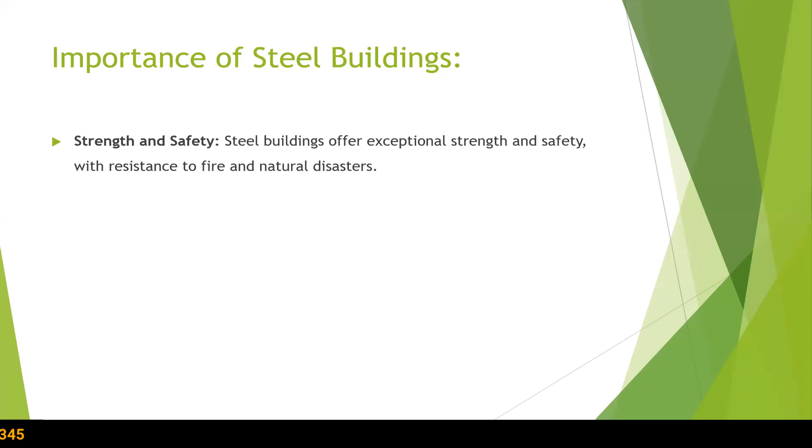Now let's understand what is a steel building. Importance of steel building: why are steel buildings important as compared to RCC buildings, or what is the basic difference between them? As every one of us knows, steel is a structural member. It has some structural strength. That is why it can be used to build any kind of structural system, like steel buildings. It has exceptional strength, and when we have proper coating over it, it can also be fire resistant.

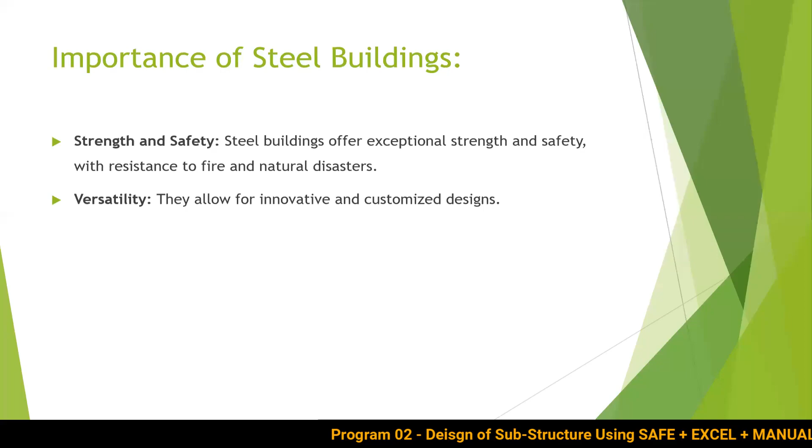The next importance of the steel building is its versatility. Because of steel, we can customize it. If we compare the steel building to an RCC building, it is very difficult to have customization in an RCC building once it is constructed, because we cannot easily modify things in concrete. But when we construct a steel building and at a later stage want any kind of modification, it is possible. That is one of the advantages of steel.

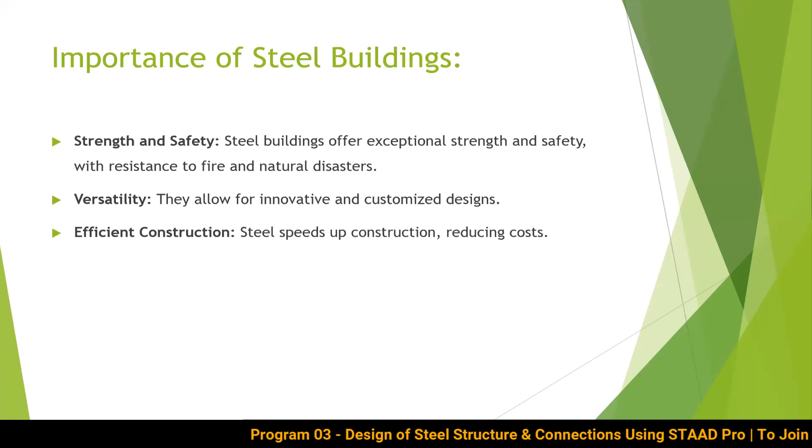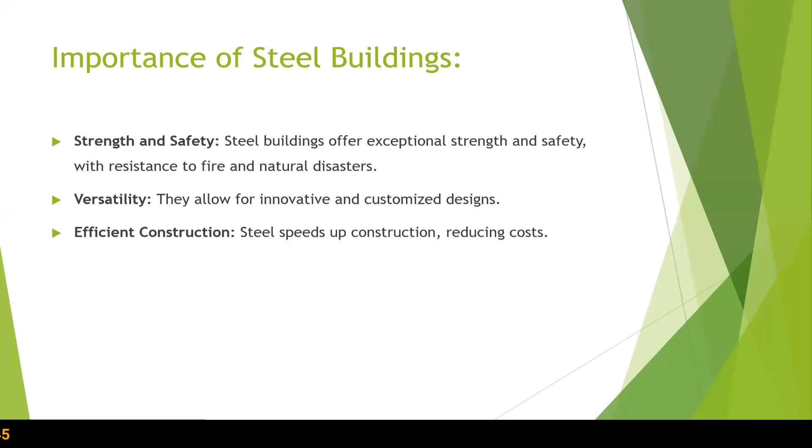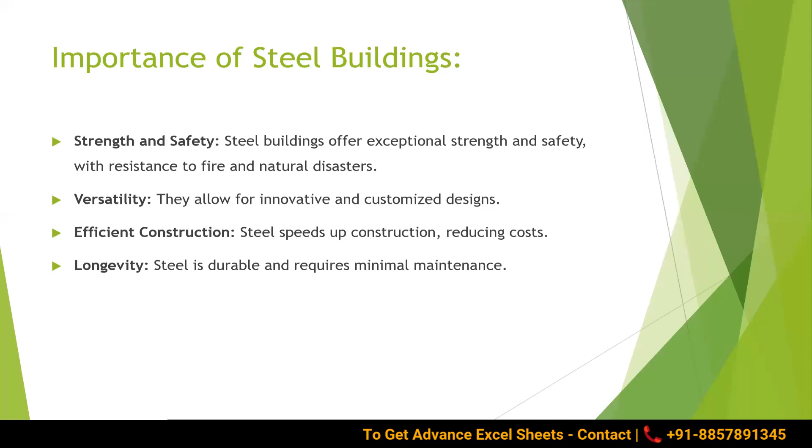Of course, all the members like columns and beams are prefabricated in a warehouse and transported to the construction site, where they are quickly assembled. This will also be cost effective and could speed up construction compared to an RCC building. And steel is a durable material, which is why we can have a long lifespan of a structure. One of the advantages is strength to weight ratio.

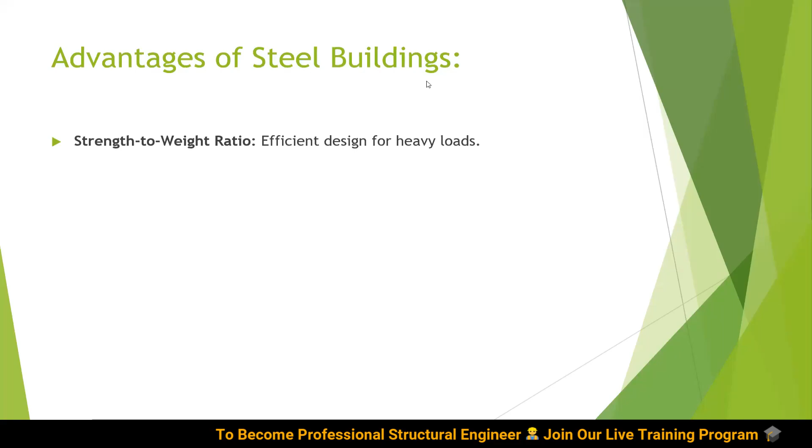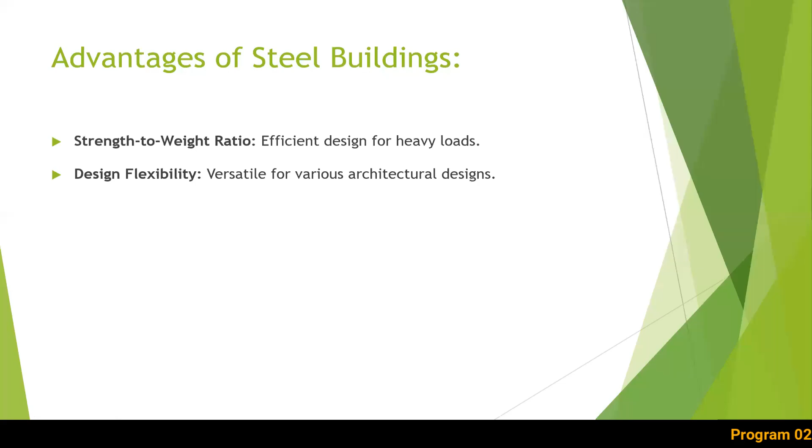So one of the basic advantages of a steel building is the strength to weight ratio. Compared with an RCC column, a steel column is smaller in size, and it also has an advantage in weight. So when we compare the ratio of strength to weight, steel is on the better side. Next, we have design flexibility. As we have already discussed, flexibility in design is possible in a steel building, because you just have to weld or bolt additional members to it. In an RCC building, it is not easily possible to make changes.

Next is sustainability. As steel is a recyclable material, it is easier to recycle compared to RCC concrete. Once we cast concrete and then demolish it, we cannot use the same RCC again. But in the case of steel, you can recycle the steel and use it next time. So it's an eco-friendly thing.

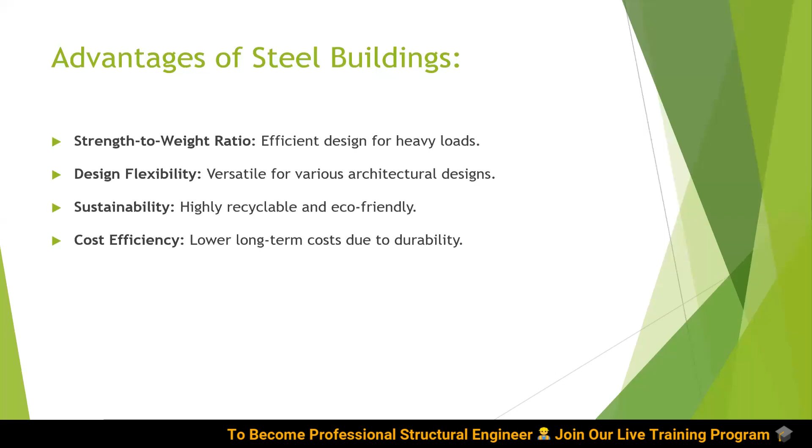Cost effective. Generally, we cannot say that steel buildings are cost effective. Of course, they are costlier compared to an RCC building in the initial stage, but it depends from project to project. With proper engineering, the initial investment could be more, but in the long term a steel building could sometimes be advantageous compared to an RCC building, if we compare all the other factors involved.

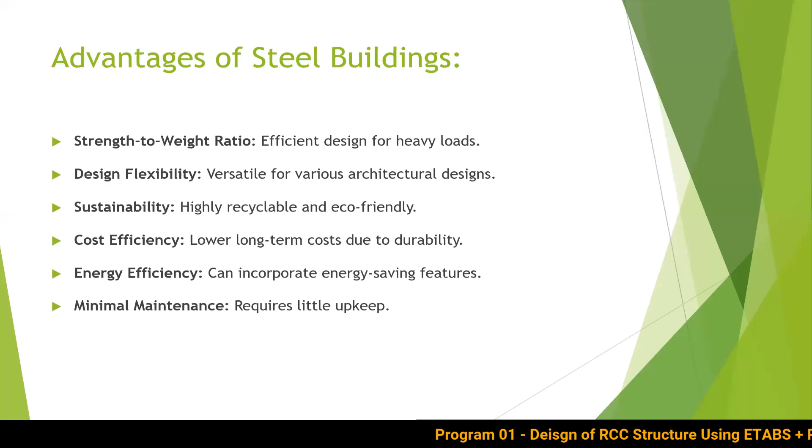Next is energy efficiency. As it is a recyclable material, we have efficiency in energy and it is good for the environment. We have minimum maintenance in steel structures. One of the most important problems with a steel building is rusting. Nowadays we have certain chemicals which, when applied to a steel building, make it rust proof. So this problem can also be solved, and it requires minimum maintenance.

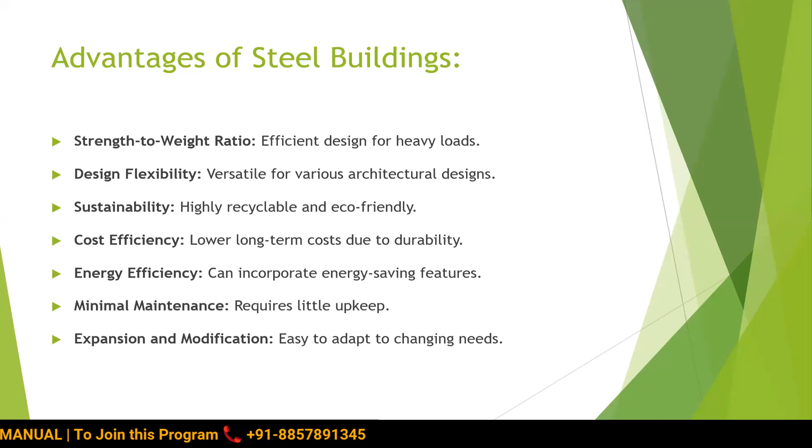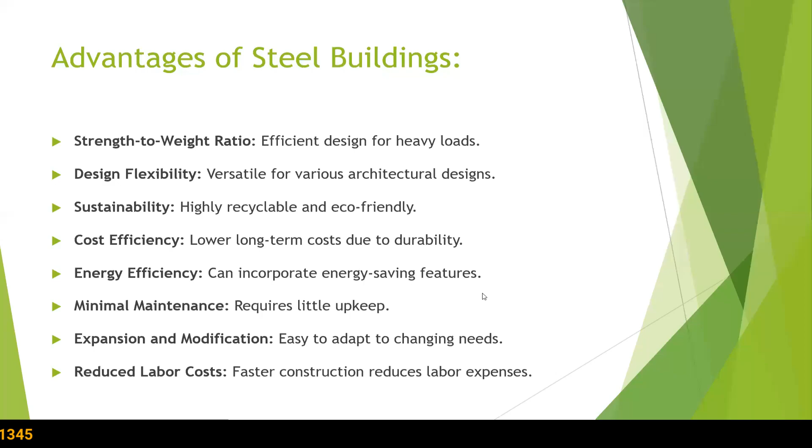And as it is flexible, it is easier to expand a steel building, and if you want any kind of modification, it is easier. All the elements of a steel building, whether a column, primary beam or secondary beam, are fabricated in a workshop and then transported to our site, where we can erect them quickly. So this is faster compared to an RCC building, and we can also have cost benefits. Okay, so these were some of the advantages.

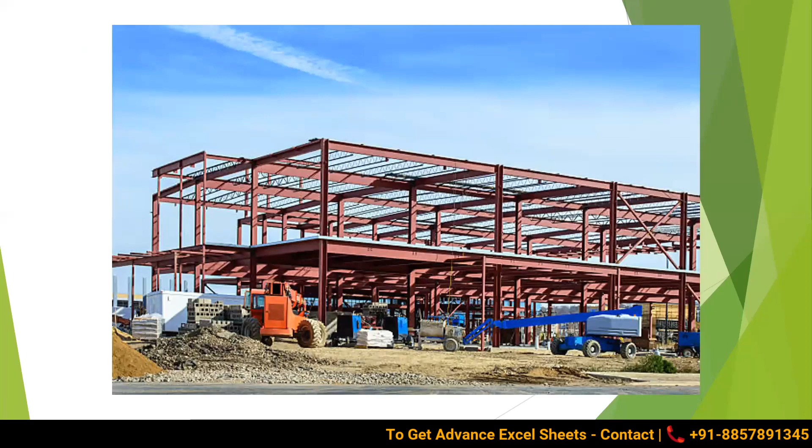I will show you some pictures so that you can understand how a steel building looks, because in India we do not have many steel building structures, but this will give you a rough idea.

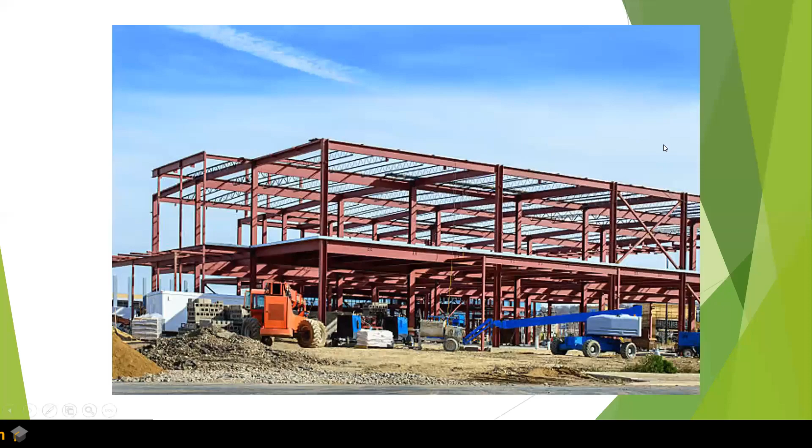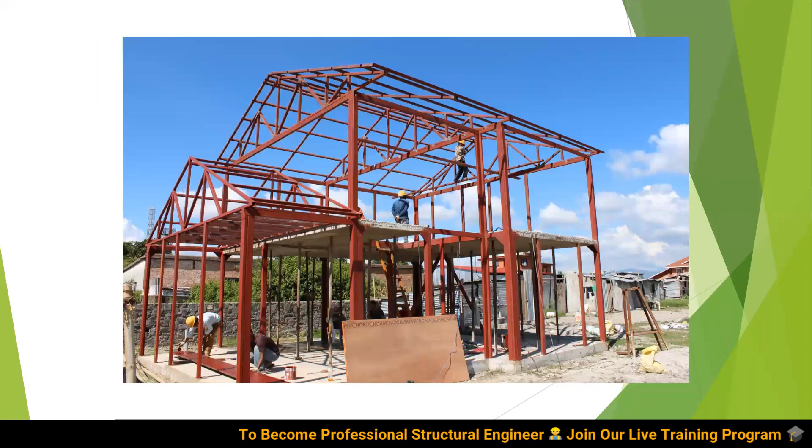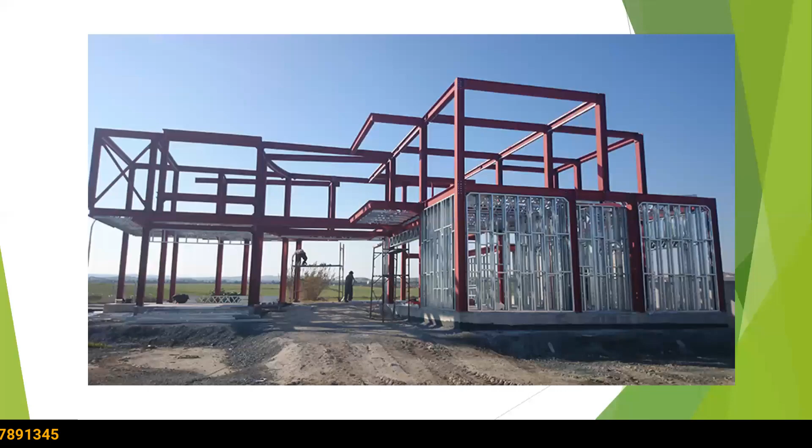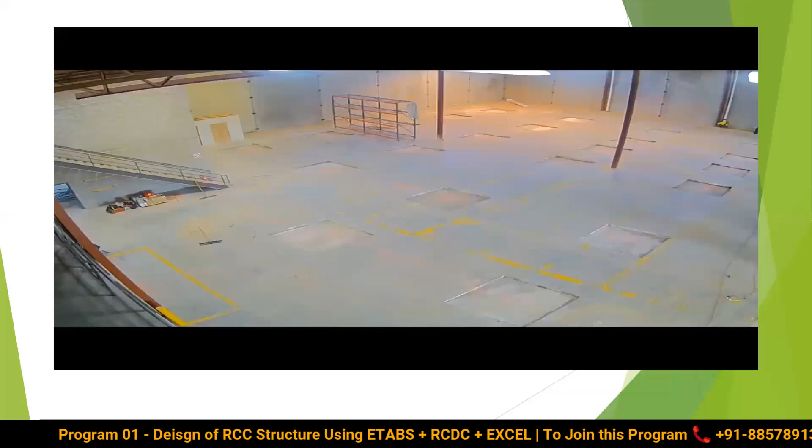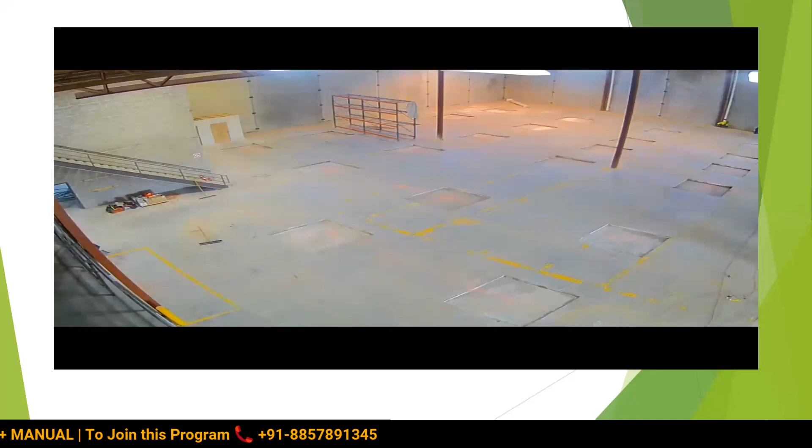Now I would like to show you one video where this is an existing warehouse and they are trying to prepare a mezzanine, that is an additional floor in the existing warehouse. And you can see they have marked the location of these columns. Now they are erecting these columns easily.

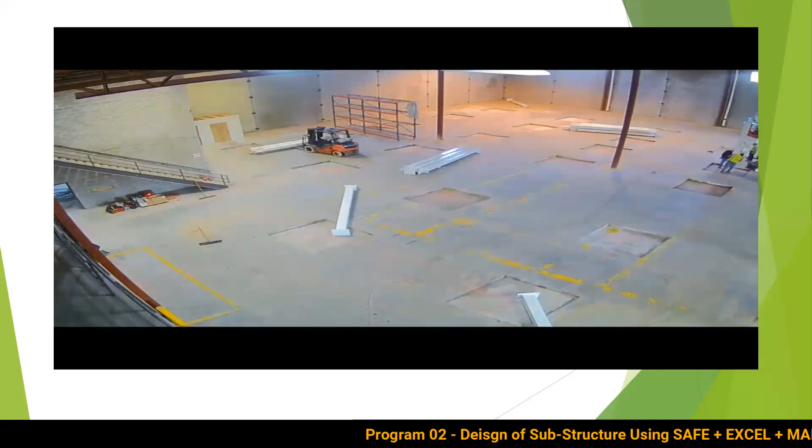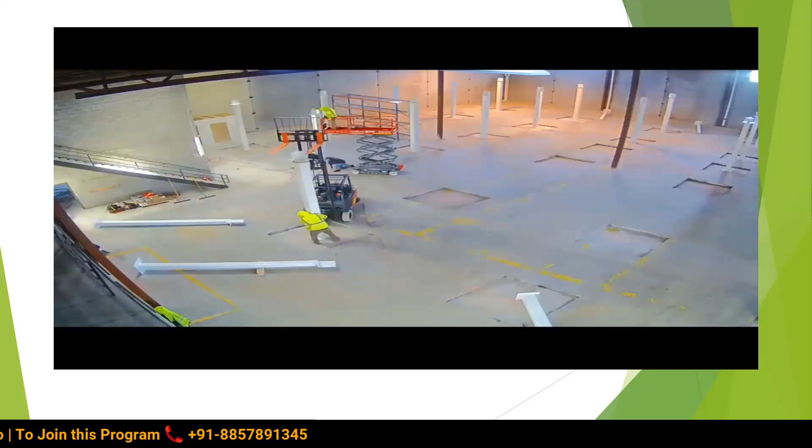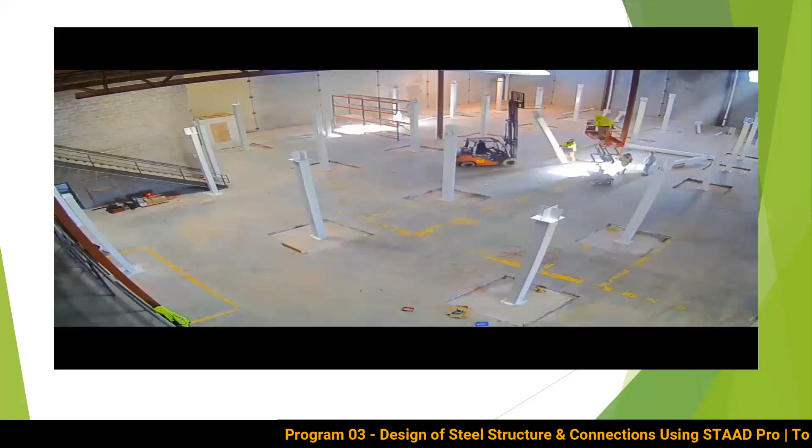Once these columns are all erected, the next step is to assemble the primary beam. The primary beam is a beam which is connecting between two columns. You can see now all the primary beams are being erected so that this forms a frame-like structure. A column and the beam form a proper frame.

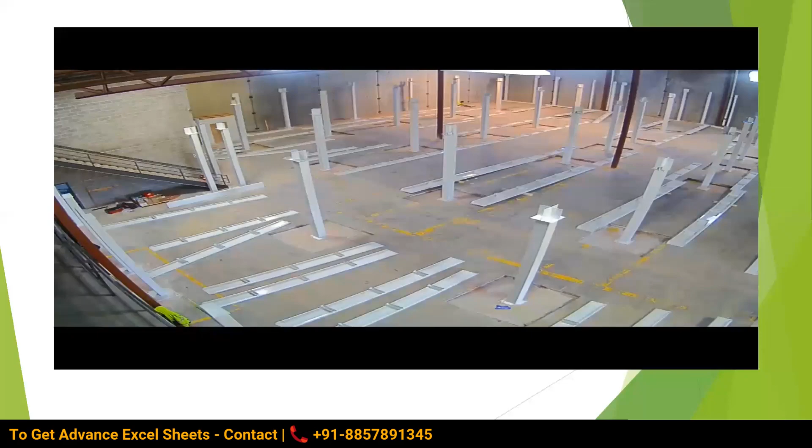Next, they have assembled the secondary beam over the primary beams. So these secondary beams are supported on primary beams at their ends. And we have some bracings. The last step is to have the slab.

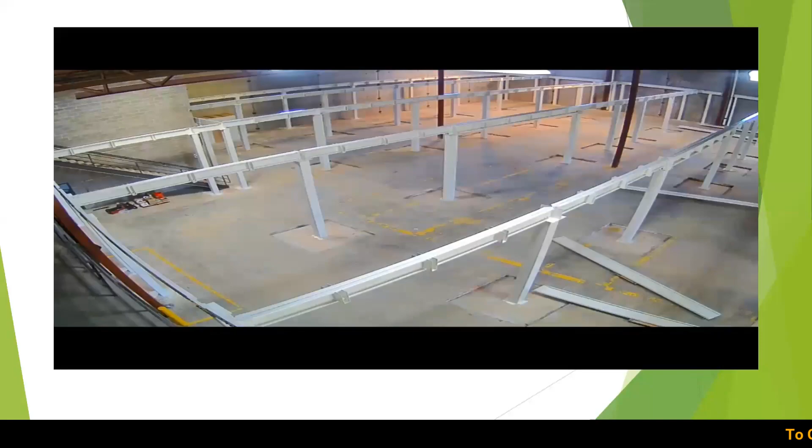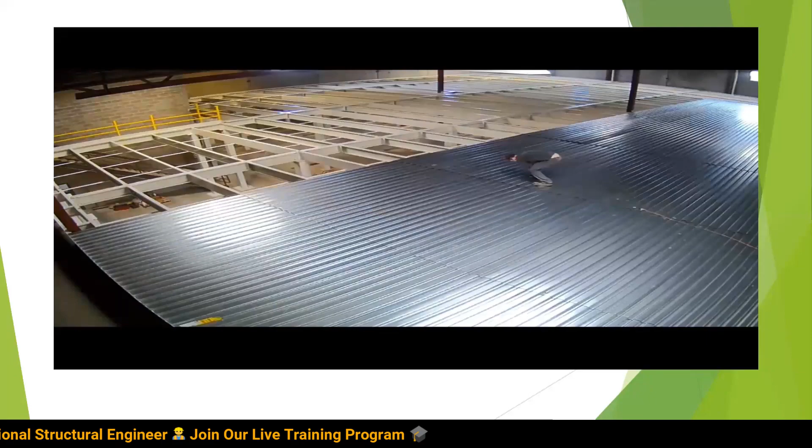They are placing these sheets which will act as a support for the concrete slab they will cast later. Once they fix this sheet to the secondary and primary beams, now they are concreting it.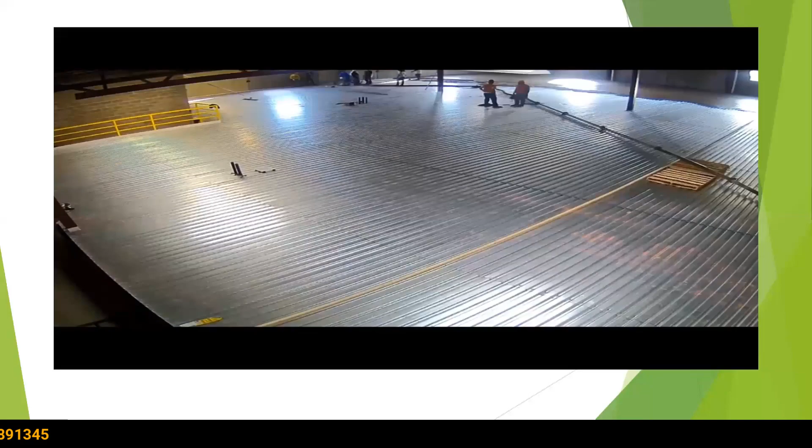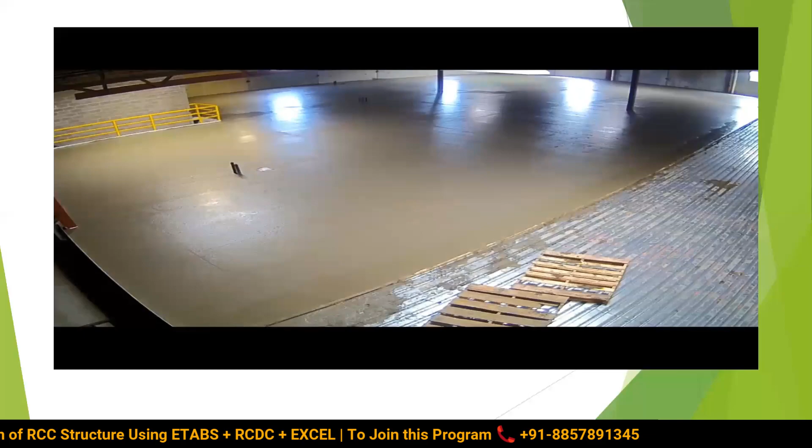So with the help of these columns, primary beams, secondary beams, and sheet, they were able to create an additional floor in the existing steel warehouse. So this is easily possible in case of a steel building. Of course, it can also be done in case of an RCC building, but that becomes a little complicated. But in case of a steel building, it is much simpler and easier to adapt.